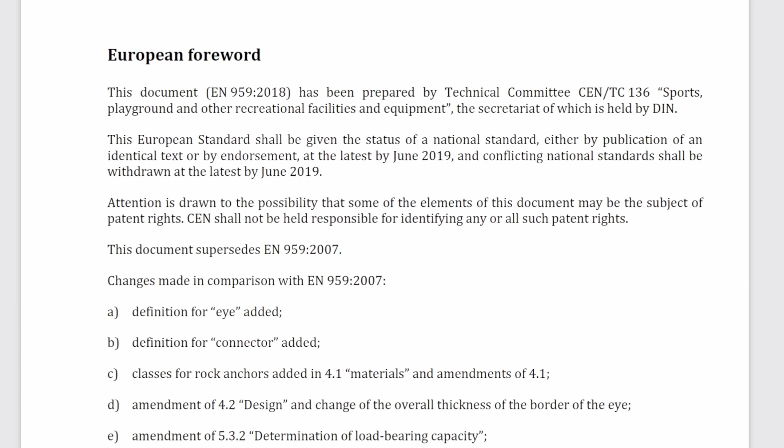Alright, so let's dive in. There's your contents, foreword. This has a bit of a change log in here. Compared to the old version, they've changed a few things. Probably the most interesting thing is this material—they've got corrosion stuff in here now, a bit down there as well.

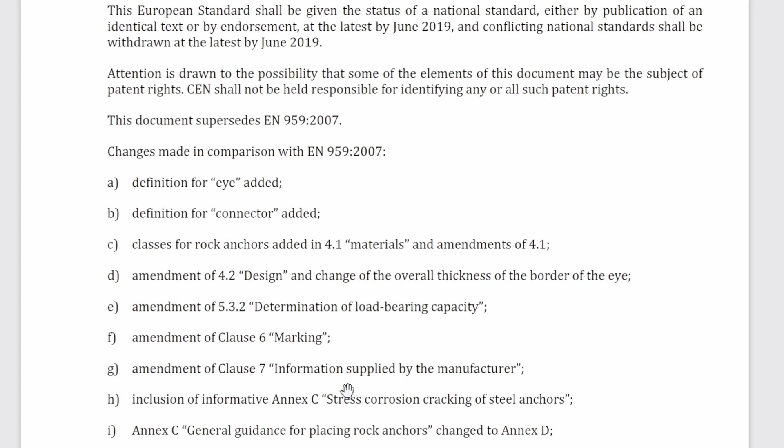Introduction. So this basically all started with the UIAA. It started with rock climbers, not with the European government trying to tell rock climbers what to do, but the rock climbers actually saying, hey, let's try and get real proper standards going for all this kind of stuff that our lives depend on. So, people power. Okay, we got scope, we got some definitions, blah blah blah.

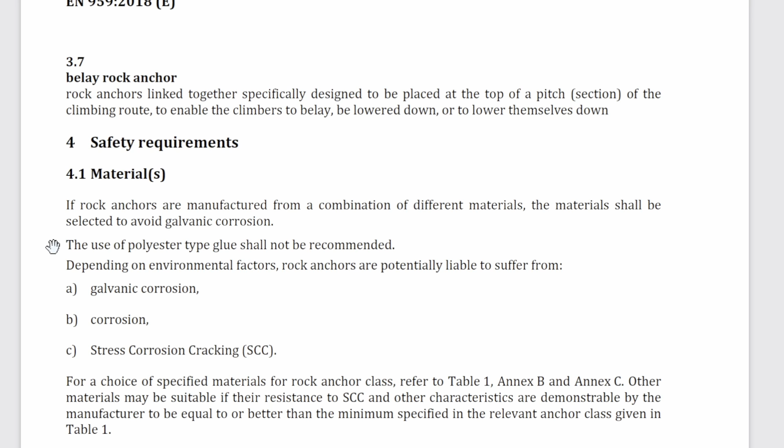Take a look at all those if you like. Now, materials—this is new stuff for the 2018 version. So, straight off the bat, we've got some great stuff here. Don't mix metals, don't use polyester glue—that's like the weakest of the three main types of glue. Be aware of different kinds of corrosion that might be happening where you're installing these.

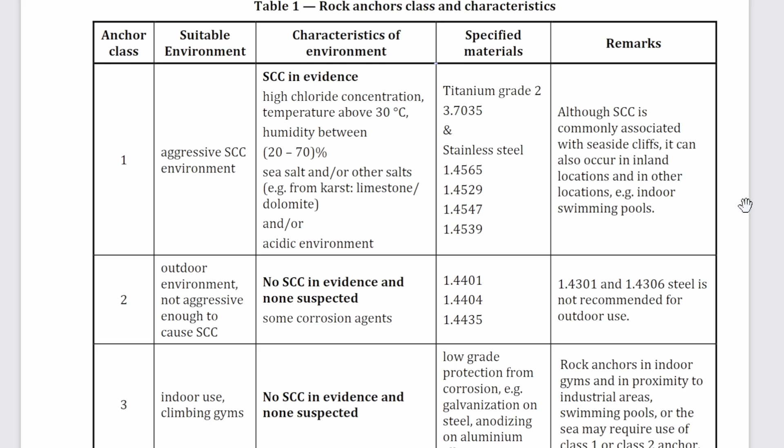Alright, table 1, straight into the good stuff. We've got the kind of material you need for different corrosive environments. Class 1 is basically your titanium, where stress corrosion cracking is going to happen—so that's if you're in Tonsai, Cabo de Roca, places like that. Normal outdoor environment, that's going to be your 316 stainless steel. And then indoor use is basically your plated steel, that kind of stuff—except if you're near a source of corrosion like a swimming pool.

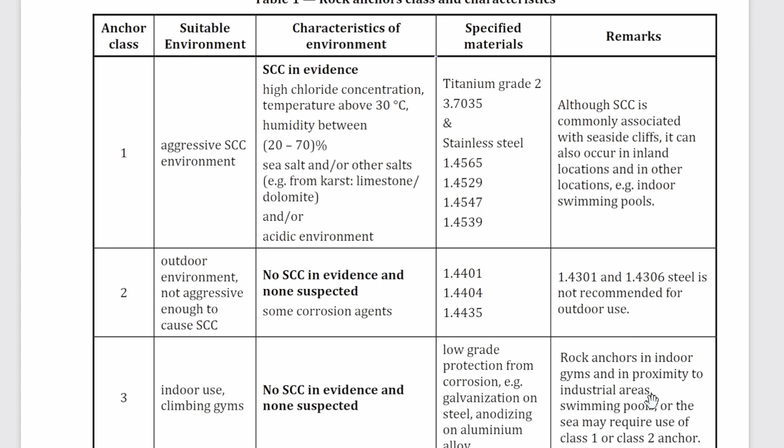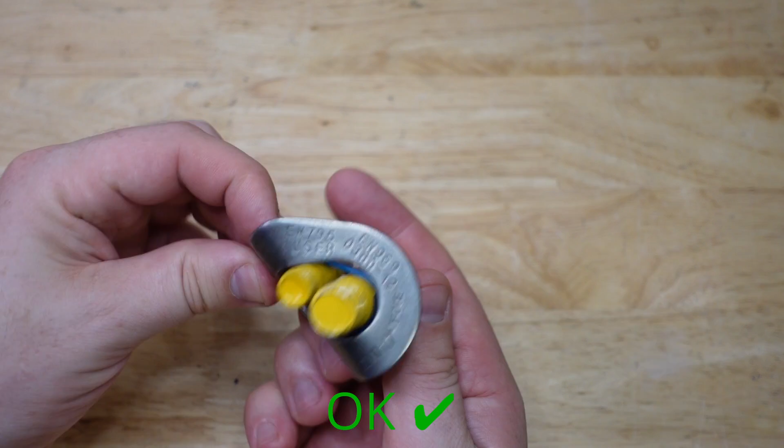All right, next up is the design. They talk about how big the eye is, how thick the metal has to be, rounded corners, that sort of stuff, and we'll see that down here. With the eye, it's got to be able to fit something that's 11 millimeters and something that's 15 millimeters across through there—so if you've got two rods or pins, you can stick them through. And that's basically saying it's going to be big enough to fit a carabiner and maybe some other things in there.

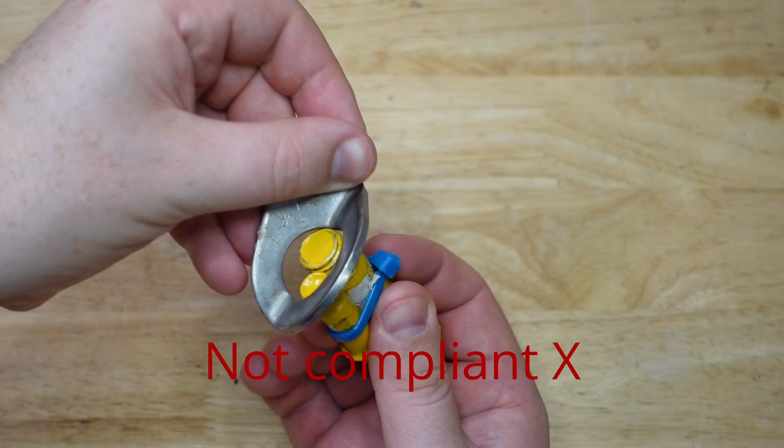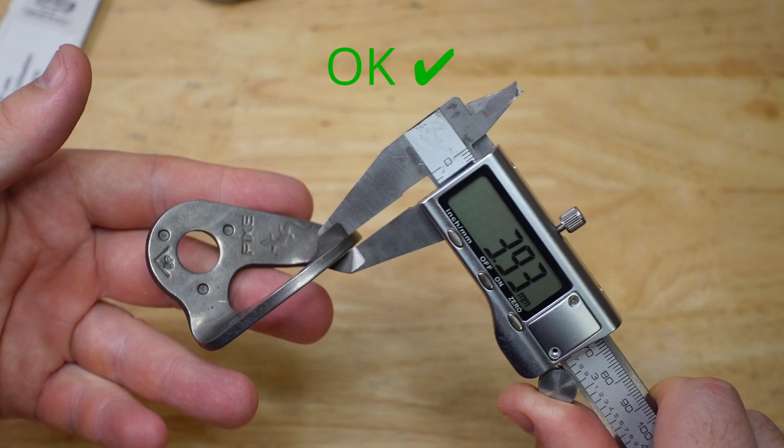Now, this is a good one here. Shall not be dependent on contact with the bottom of the drill hole. So that's your drop-in anchors and a few other styles—they are out. Great one.

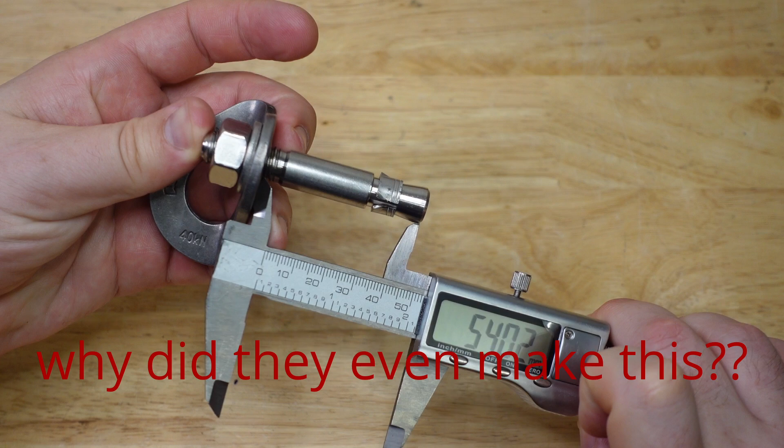Now this is one of my favorites. For glue-ins, we've got to be at least 70 millimeters long. Now, before I started doing pull testing, I thought that was a little too short, but I've had plenty of strength out of shorter bolts than that, so these guys have done their homework. For mechanical anchors, the installed length has to be 5 times the diameter of the drilled hole. And a little note, which is awesome—in soft rock, you may need to use longer bolts than that.

And this is another great one. If it's like a chain anchor, the whole thing has to be rated to 25 kilonewtons. So for a chain anchor like this, it's got to be end to end, the whole thing, got to take 25 kilonewtons. So you can clip into any part of it.

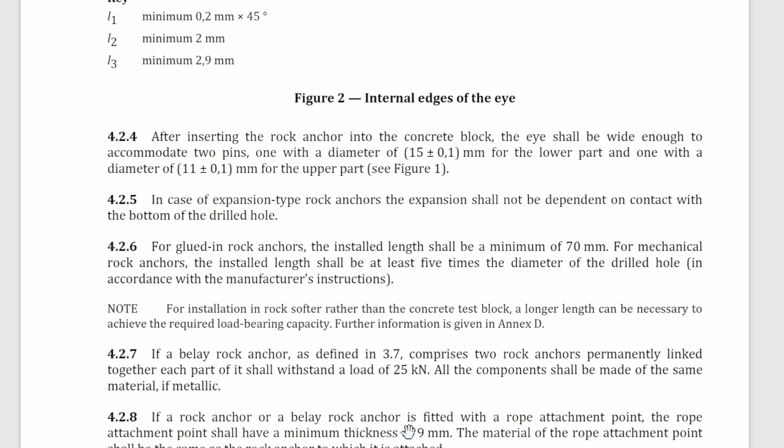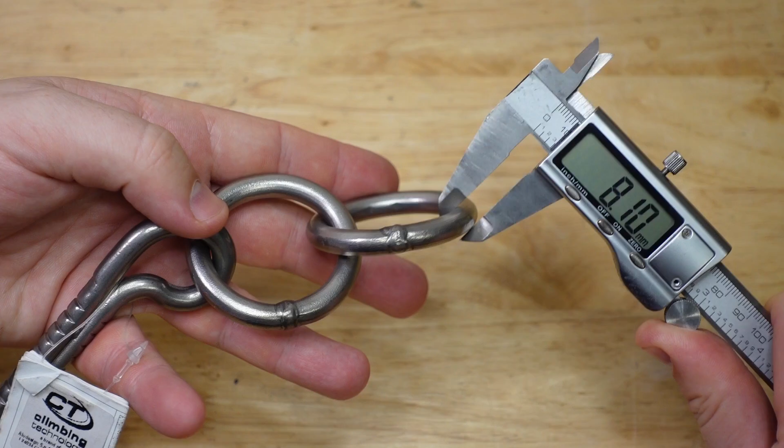Another great point here. So if it's a rope attachment point, it's got to be at least 9 millimeters thick, which is why most rings you find are going to be 10 mil. Some of them are 8, and unfortunately those guys aren't actually going to comply with this standard. So that would comply with the 2007 version, but not the 2018 version. And don't mix metals once again.

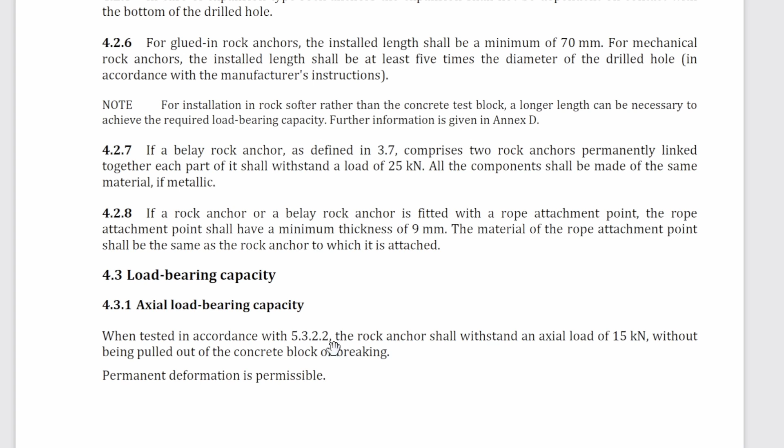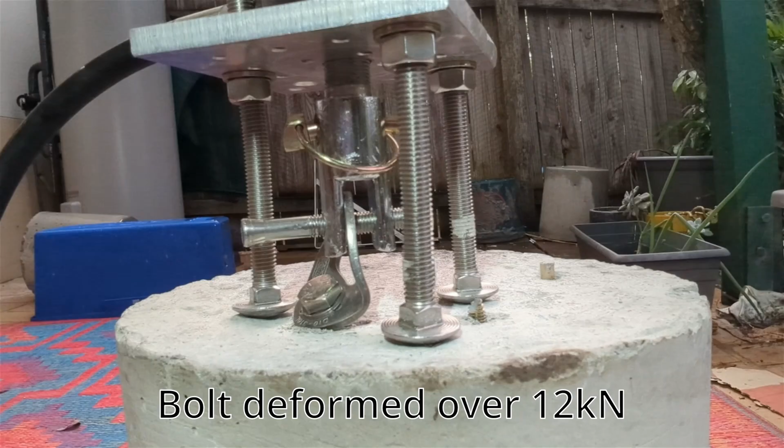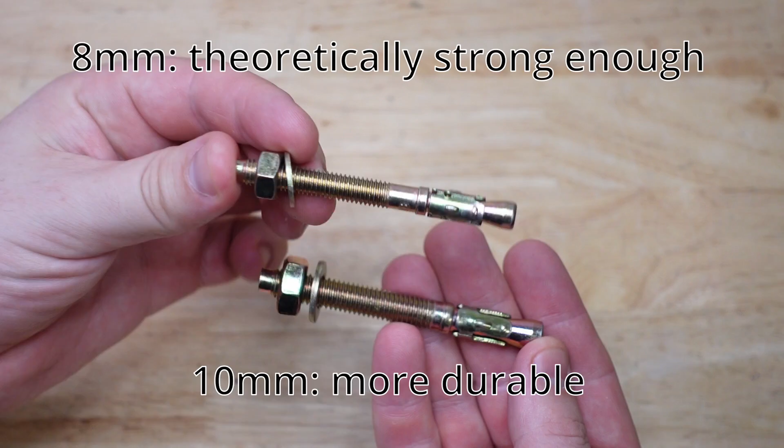All right, so load bearing capacity. Axial pull, it's got to be able to take 15 kilonewtons without being pulled out or breaking. And this is an interesting part: deformation is permissible. Now, obviously with rock climbing bolts, we don't want deformation. So this is why you want to use a bit more of a safety factor, because if you've got like a little 8mm bolt, maybe it can take 15 kilonewtons axially, but then it will be deforming at 5 or 6. We don't want that. We want to have a bit more headroom for our anchors, so that's why we'll basically use bigger stuff that's not going to be deforming.

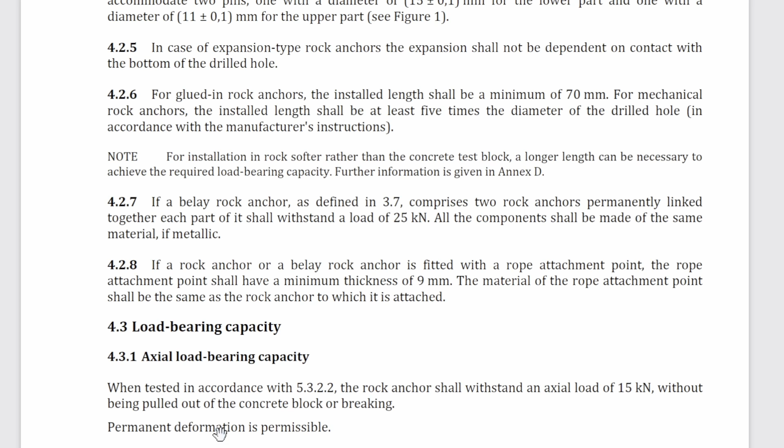Okay, so radial pull, this is so-called shear, 25 kilonewtons. And then this next part, all the parts of the anchor need to be 25 kilonewtons.

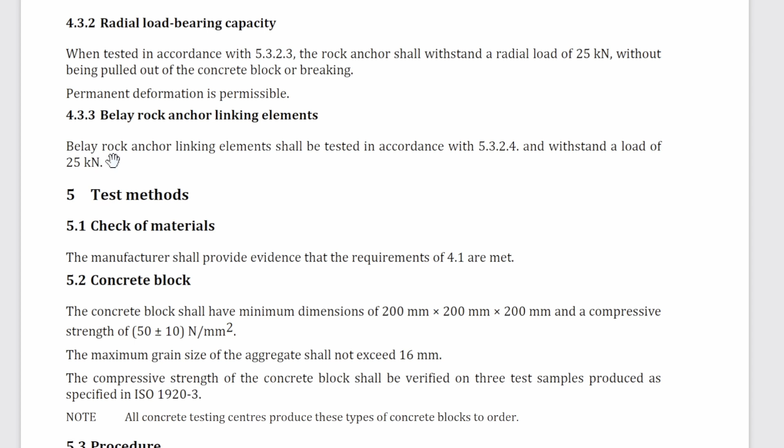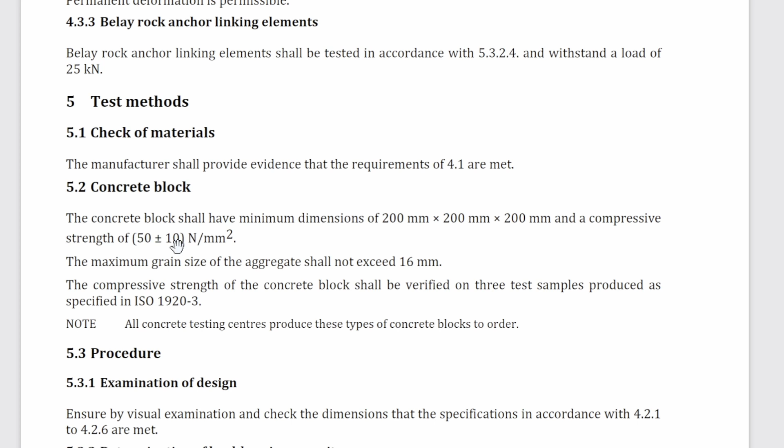Now, test methods. How do we actually test this? So the manufacturer has to prove that they've actually done the testing in accordance to this. Then you're actually going to need a concrete block, so 20 centimeter cube at least, and a compressive strength of 50 MPa. So I usually use 32 MPa, but you can get 55.

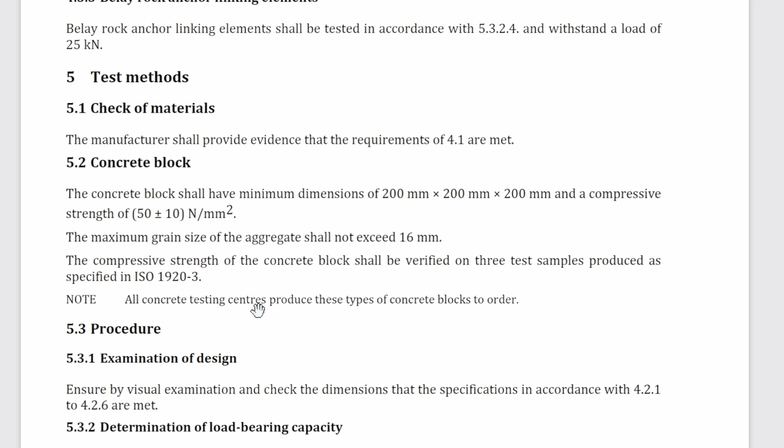And this is an important point: if you're going to be doing your own tests, the aggregate shall not exceed 16 millimeters. So be sure to get fine aggregate. Compressive strength of the concrete block shall be verified on 3 samples and according to another standard. And basically if you want to do this kind of thing, it's much easier to just go get a concrete testing center because they make this sort of thing.

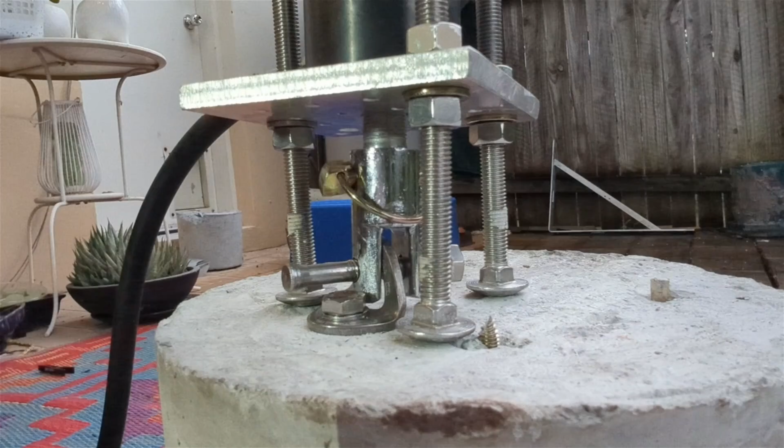So how are you doing the test? Check your setup, install the bolt, and then the testing procedure. If you want to do this, the interesting thing for me is they actually do apply a load of 8 kilonewtons first. I've done this kind of testing before. It is a bit of a pain, but it's really interesting because that's showing this sort of cyclical loading that your rock climbing bolts are going to be experiencing.

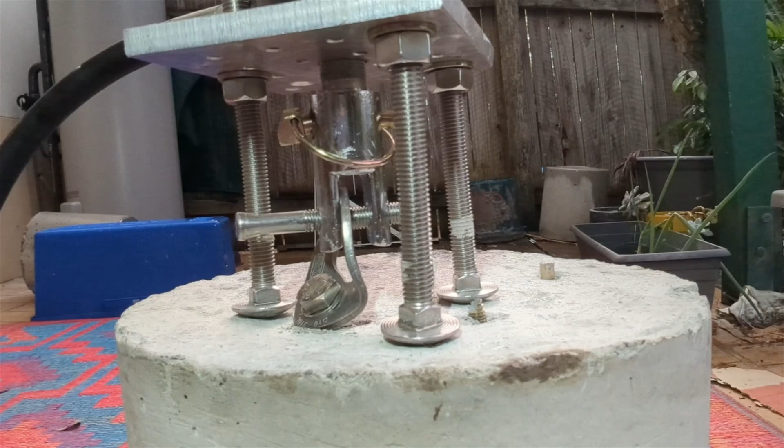They're probably not going to get 8 kilonewtons, but normal bolts are made for construction. They're made for static loading. You build the house, you put up your railing, whatever, and then it just stays there. With climbing loads, you do get cyclical loading and things can loosen with that. And once again, I like this because it's showing that this is really rock climbing specific anchors.

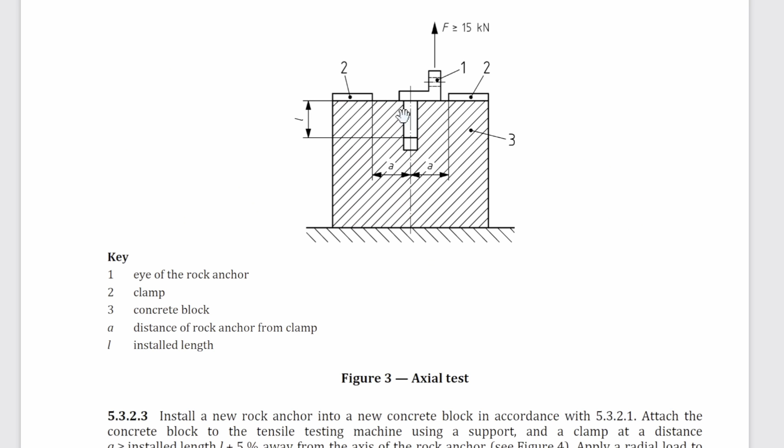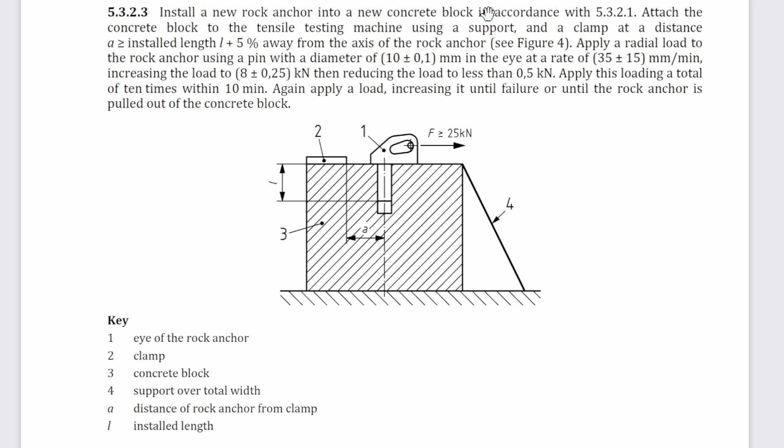And there's a picture of the axial test, so pull upwards 15 kilonewtons. And here's the radial test, so basically the same procedure, install a new rock anchor into a new concrete block. So that's pretty important, I guess. I'm glad they pointed that out. And then if you're pull testing a chain anchor, you pull the entire thing through the eyes of the hangers.

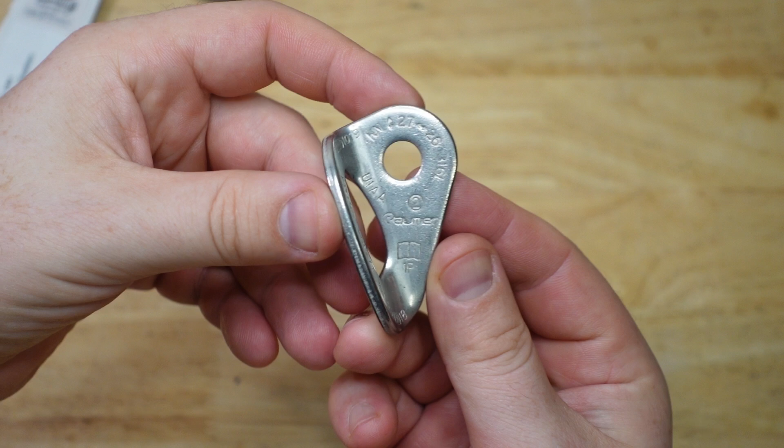All right, so marking. To comply with this standard, you've actually got to say you comply with this standard, which is great, as well as a bunch of other stuff: name of the manufacturer, serial number, anchor class. So that's your material, that's why it has the little 2 in the circle here. And that's why Fixe Hardware finally changed to using 316 stainless steel after years and years of using worse stuff.

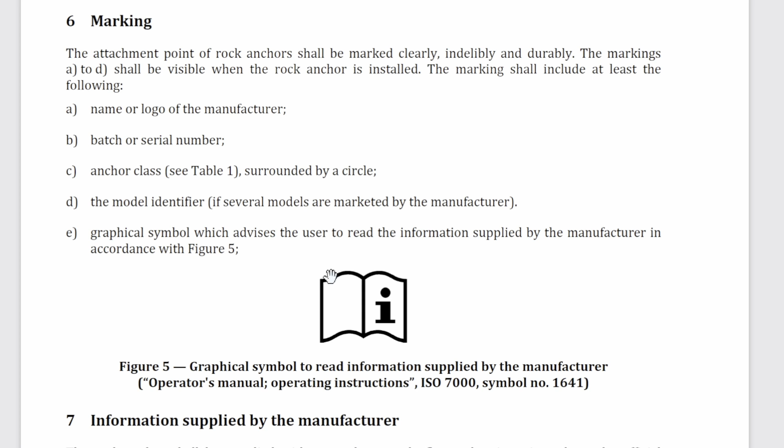Because they had to if they wanted to comply with the new version of this standard. And then it's also got to have this little thing that says read the manual. Believe it or not, this is actually required to comply with this standard. It's got to have the little read the manual symbol. And of course, that little symbol there is number 1641 from ISO 7000, so that is a specific symbol designed for this purpose as required by another standard.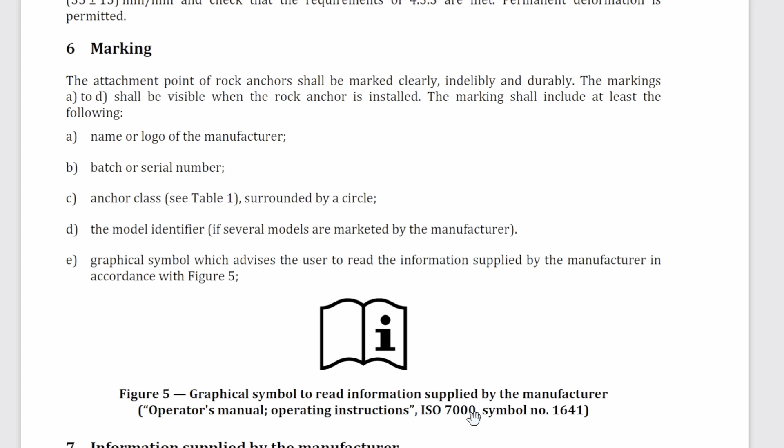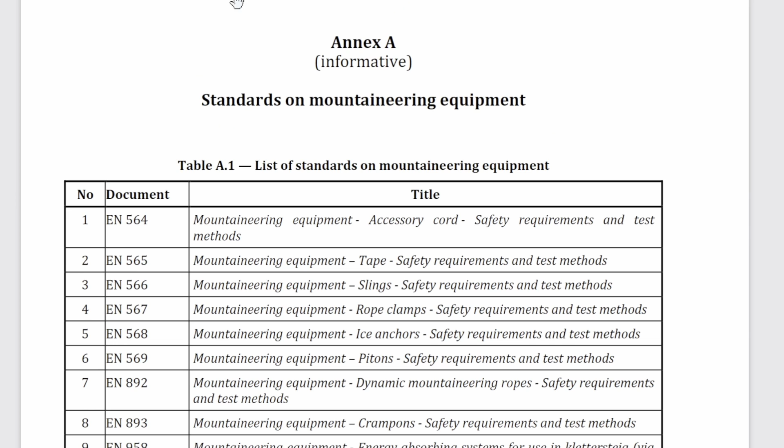Love it. Information: it's got to refer to the standards that it complies with and how to install it and so on. A little bit more info for the manual down there. So Annex A, this is all these other standards which cover mountaineering equipment. Annex B, this is just about environmental conditions and corrosion and stuff.

So this is Annex C. They're talking about stress corrosion cracking. So chloride's obviously the main thing you've got to worry about. But then all this other stuff, like it's not mentioning sulfur at all, no sulfur reducing bacteria. This is relatively new information that has been basically discovered by Dave Reeve over at cragchemistry.com.

So go check that stuff out. It's super interesting. And it explains why specific areas will have bolts that literally just crumble under your carabiners and other areas don't. And this table, this is good because it's in the newer version of this. It wasn't in the older version of this standard, but it's also not referencing the cutting edge information yet, because that's not what standards are for.

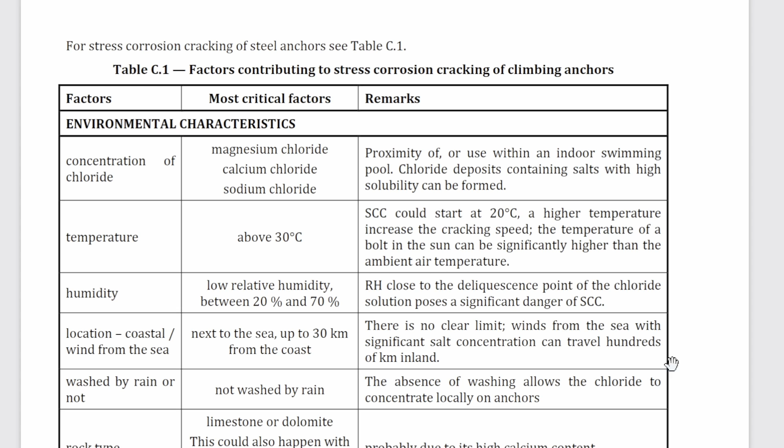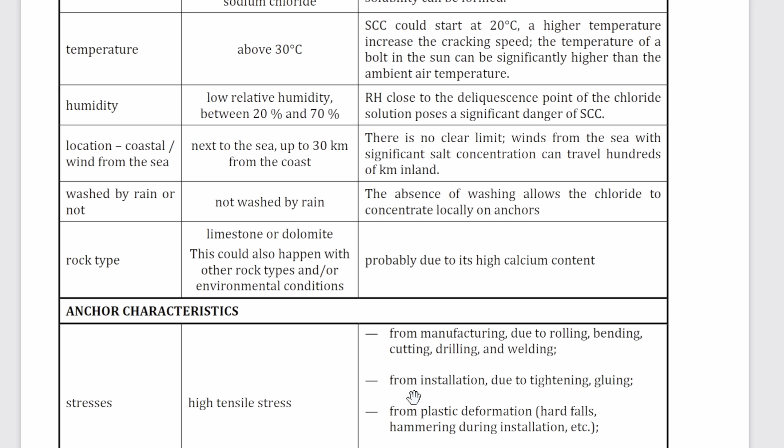Standards are meant to describe the well-established, well-demonstrated, proven conditions that things are working in, and the whole sulfur-reducing bacteria thing that Dave has recently discovered, it's still pretty cutting edge. And then this is the stress part of stress corrosion cracking, is actually the stresses from manufacturing, creating little cracks or little voids or whatever in the metal, and that's where your corrosive stuff can get in and start causing problems.

Annex D, so this is the kind of stuff that us bolter, YouTuber sort of guys bang on about all the time. Basically, you need to know your own rock, you should really do your own testing, that kind of thing. I mean, you can refer to a standard, but at the end of the day, you need to actually make sure you're doing what's right for your own rock. So if you're using an expansion bolt that complies with this standard in soft rock, then that's obviously not going to work.

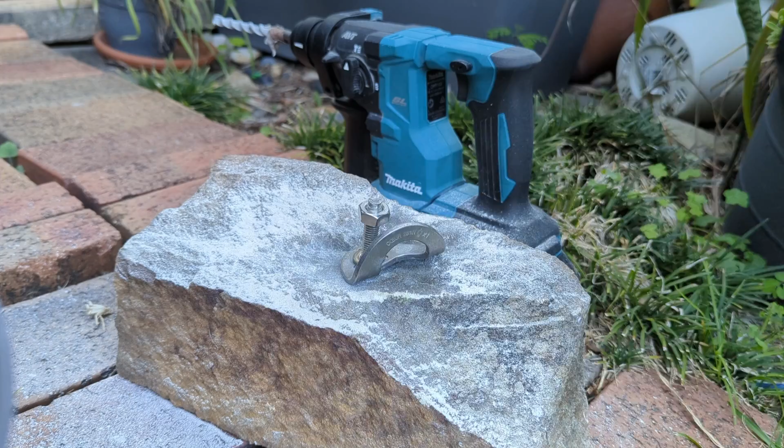So this wedge bolt in this sandstone might actually comply on paper, but the rock is obviously too soft. So here they're saying, look, you still need to do your own work for your own situation, which is always gonna be the case. Well, there you go.

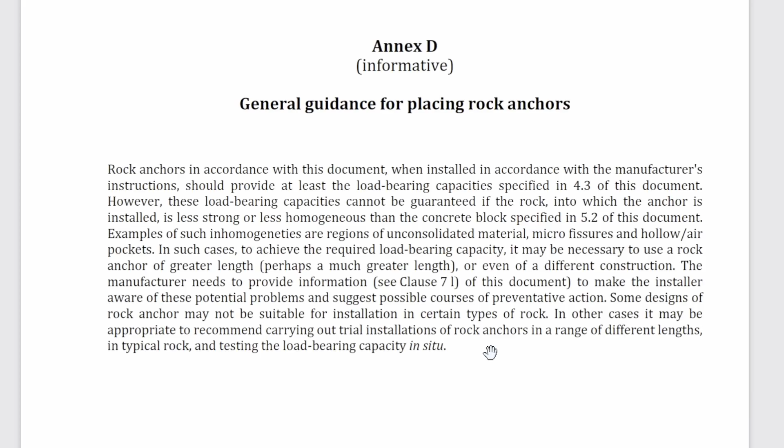Hopefully that was interesting. Hopefully at least now you know why these things that we clip and we trust our lives to have all this stuff written on them. But if you've made it through this whole video, then chances are you do actually care about the bolts you're probably installing yourself if you're watching this channel, but also maybe clipping too. But do you as a bolter need to worry about following this exact standard? Probably not. It'll really depend on where you are and what your situation is, but chances are there's nobody enforcing it at all.

If you're somewhere like Queensland where I am, you may need to apply it in a few situations. For instance, rock climbs in national parks have to use EN959 compliant hardware. And that's actually something that the local climbers lobbied for to get put in there, because it's a way of A, getting climbing properly recognized as a legitimate activity, and B, holding up our end of the bargain to the land manager saying, look, we're not just a bunch of total yahoos. We are working to a safety standard.

Please just let us self-manage the climbing hardware, and rest assured that it's not going to blow back on you. It's not really going to cause problems for you, and you don't need to worry about it. In fact, I've been in meetings with land managers who are getting nervous about newly developed rock climbing happening on their land, and the relief is palpable when you actually mention to these guys, yeah, we are bolting to an international standard. It really helps to have some kind of technical document like EN959 that you can point to and say, these are the kind of standards that we're bolting to.

If you want to do a bit of testing or do some safety reports, or you've got some engineers in the area who are also climbers who can chip in a bit of knowledge doing some risk assessments, all that kind of stuff really helps. And that's part of what access clubs do in the background. If you're just a regular climber, you just go out climbing and you enjoy it, then that's great.